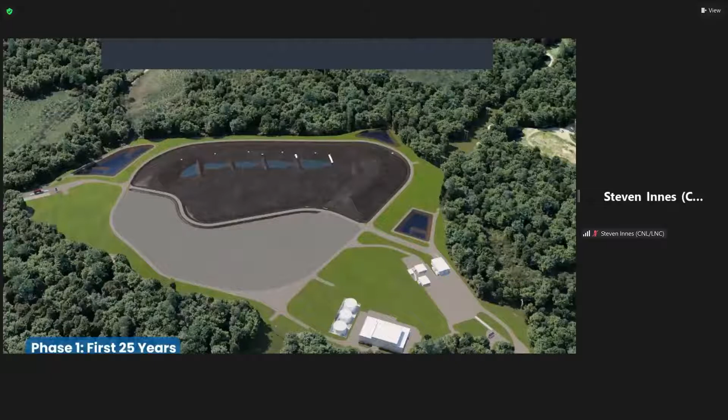Blasted rock will be recycled for use in other on-site construction activities. Following the enabling works, we begin construction of the buildings, equalization tanks, and site services. At the same time, Phase 1 of the Engineered Containment Mound, which includes cells 1 to 6, the southern perimeter berm, and temporary haul road are built. Phase 2 of the Engineered Containment Mound is expected to be built 25 years after operations begin and will include construction of the final 4 disposal cells and the northern perimeter berm.

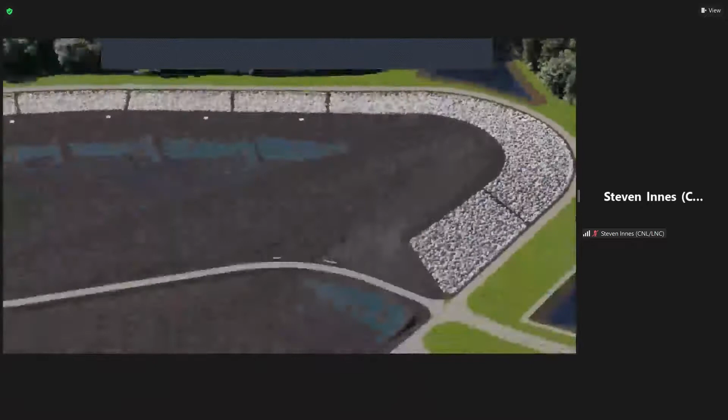Now let's take a closer look at the design and construction of the Engineered Containment Mound, which includes the berm, baseliner, and cover systems. First, we construct the perimeter berm, which forms the outside edge of the Engineered Containment Mound. It is constructed on stable bedrock from specially selected, free-draining, natural earthen materials that are designed to resist seismic forces and hold back the weight of the waste pushing against it. The liners of both the cover and baseliner systems are securely locked into place on top of the berm below the perimeter road.

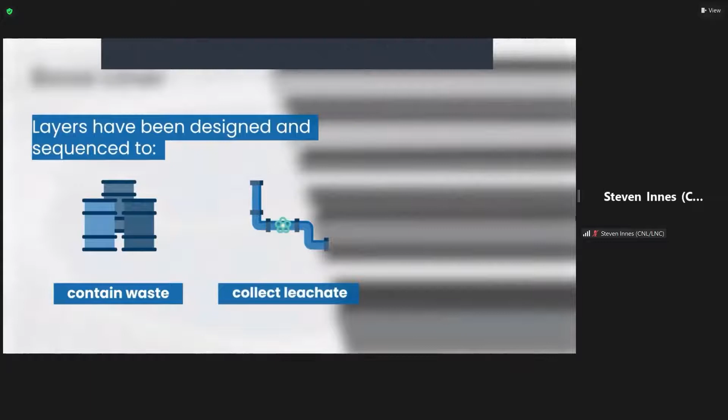Next, we install the 13 layers of the baseliner system. Each of the individual layers has been designed and specifically sequenced to contain the waste, collect leachate - which is the water that has filtered down through the waste - and protect groundwater to ensure the long-term protection of the environment and human health.

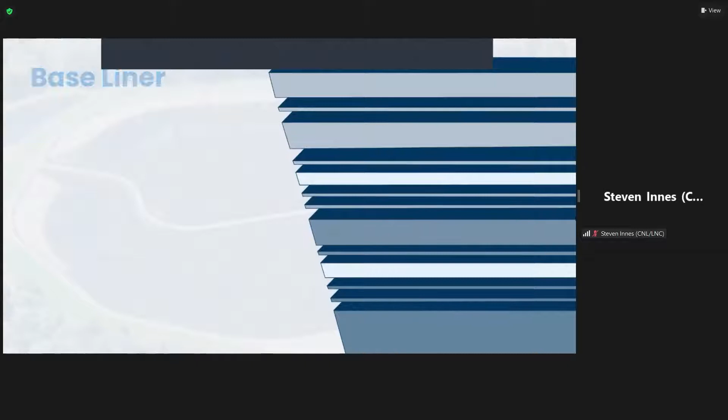Working our way up through the layers of the baseliner system, we start at the lowest level, which is formed by the secondary composite liner. This layer consists of a compacted clay liner, geosynthetic clay liner, and a textured high-density polyethylene liner. By using alternating natural and synthetic layers, we will achieve maximum stability and impermeability for long-term protection of the environment.

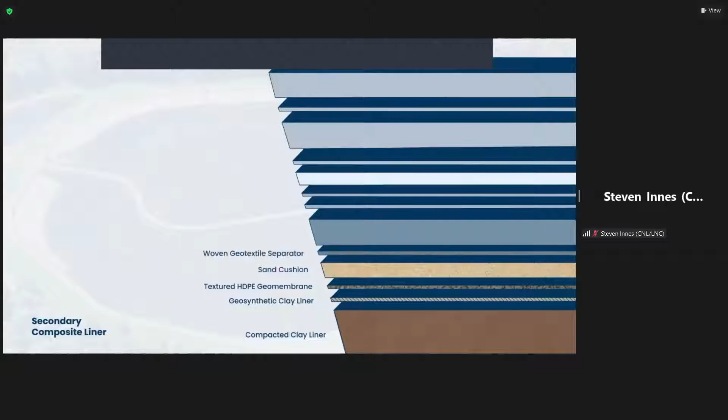Next comes a sand cushion, a woven geotextile separator, and a layer of clear stone, which contains the leachate detection system and a pathway for the removal of any leachate that may have passed through the liner above. From the leachate detection layer, we move to the primary liner, consisting of a high-density polyethylene liner and a geosynthetic clay liner that work together to provide a strong barrier.

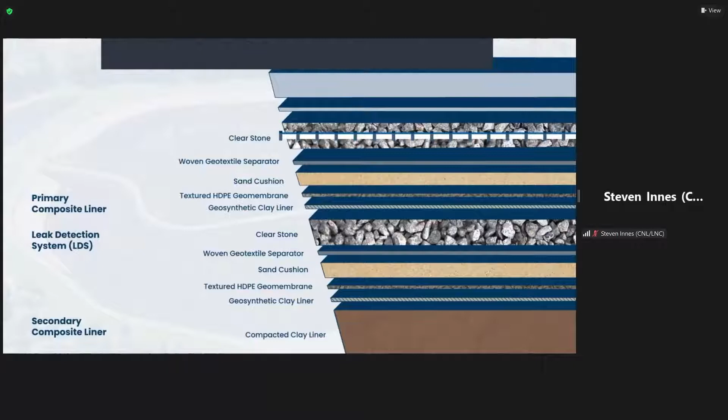Above that, a sand cushion separates and provides additional liner protection. Next, we find a woven geotextile separator and a layer of clear stone with pipes running along the valley of each cell. These perforated pipes collect and channel leachate to extraction sumps at the base of the berm from where it is pumped to the equalization tanks. In the top layers of the baseliner, we find textile and granular stone layers which protect the leachate collection system during waste placement activities.

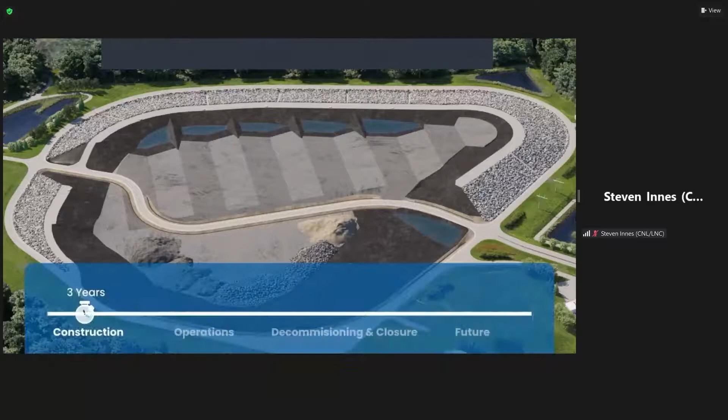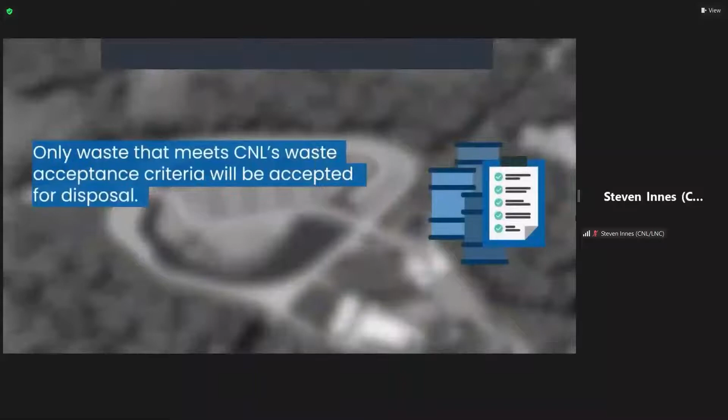At completion of the 3-year construction period and a commissioning period, the NSDF will transition into an operations phase. Prior to commencing operations and any waste being received, CNL will apply for an operating license from the CNSC. As a first step in the operations phase, a weather cover will be installed over the active cell prior to waste placement activities commencing. The primary mission of the cover is to prevent precipitation from contacting the cell floor and placed waste. Only waste that meets CNL's waste acceptance criteria will be accepted for disposal, and all waste will be placed in accordance with the waste placement and compaction plan.

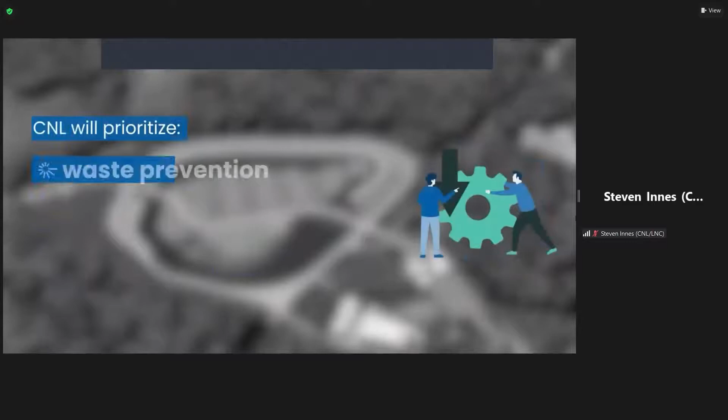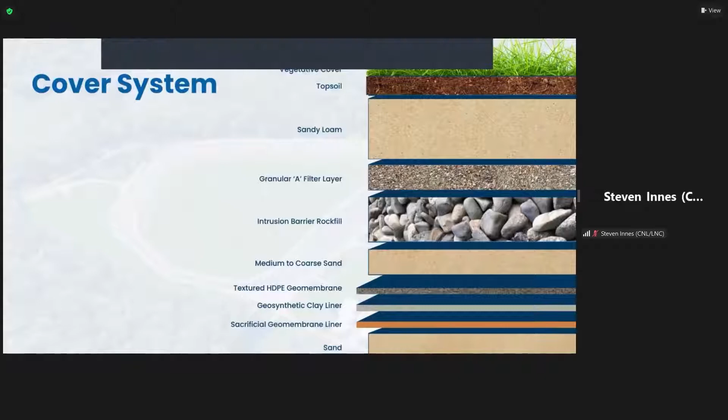CNL will prioritize waste prevention, reduction, and diversion to reduce the amount of waste that goes into the NSDF. Waste will be placed in small steps to maximize density and reduce empty space, minimizing the potential for future settlement. Once each cell is filled, an interim cover is placed to provide protection of the environment until the final cover is installed. The final cover is placed during the operational phase as cells reach capacity and are closed. It is made up of similar alternating layers of natural and synthetic materials which isolate the waste, provide radiation shielding, create a barrier to intrusion from plants and burrowing animals, and keeps precipitation from contacting the waste.

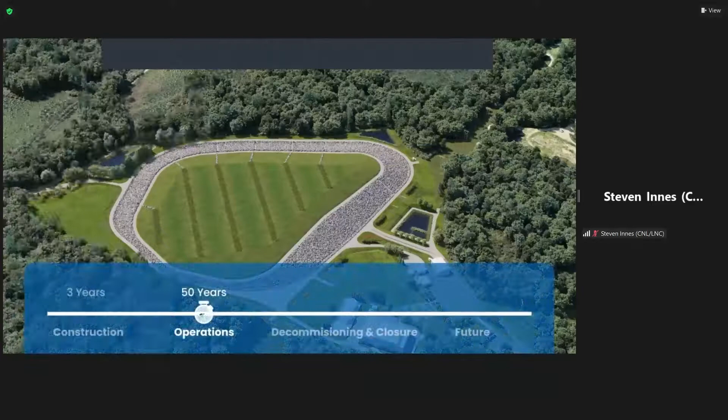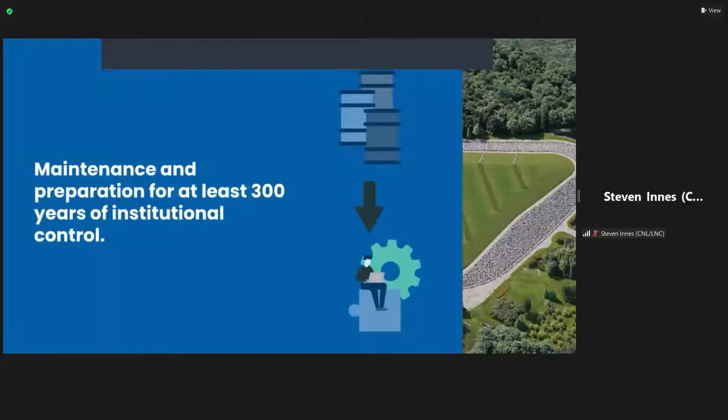Following closure of the last cells, the NSDF transitions from the 50-year operational period to a 30-year closure period. During the closure period, the focus moves from active waste placement towards long-term monitoring, maintenance, and preparation for at least 300 years of institutional control. 30 years may seem like a long time, but this period ensures the ECM reaches stabilized conditions and that site infrastructure is maintained and decommissioned in accordance with the closure plan.

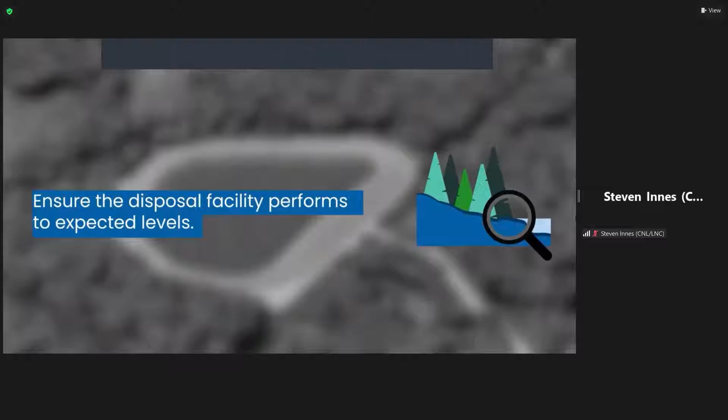The environmental monitoring program, which includes groundwater and air quality testing, will ensure the cover system, base liner, berm, and associated components all perform to expected levels before the NSDF enters the institutional control period. Through design, operations, and long-term monitoring, the NSDF project will significantly improve current and future waste management conditions at the Chalk River Laboratories site, providing safe, permanent waste disposal and enhanced environmental protection and stewardship.

Hey you. Yeah, you. I'm not a robot or artificial intelligence,

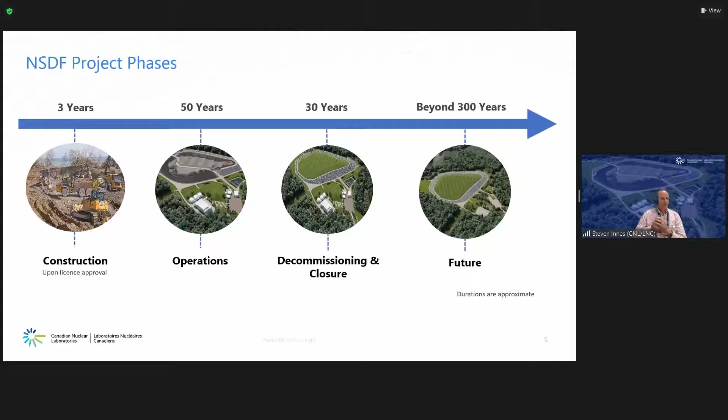Perfect, thanks. If we can jump to the next slide, please.

I think an interesting note for this project from construction: none of these buildings or facilities are overly complicated to construct on their own. The challenge within this project is really the logistics and movement of soils and aggregates through our site, as we've described previously and stated numbers in our EIS. The overall material movements represent approximately 2 million meters cubed of aggregates, with removals of roughly 900,000 meters cubed between overburden, topsoil, blast rock, and then the import of 1.1 million cubic meters of aggregates to build the ECM and all the layers of the base containment system that were described in the video. So that does take some time, obviously.